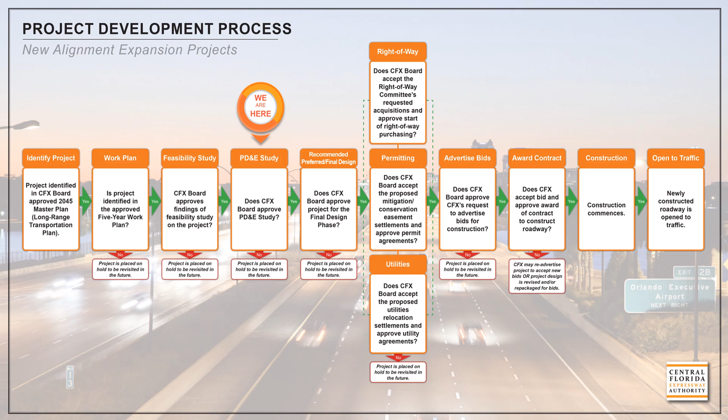The PD&E study phase considers environmental effects during the alternatives evaluation process and provides an opportunity for input during the early stages of project development as alternatives are being considered. This PD&E study will include the evaluation of the social, cultural, natural, and physical environment effects of any proposed transportation improvements, right-of-way considerations, and construction cost estimates. Any potential effects to social, cultural, natural, and physical environment resources will be avoided or minimized to the extent feasible. This study will also document potential project benefits such as improved mobility and economic benefits.

For this meeting today, we will look at the study area that is State Road 417, or the Central Florida Greenway, from State Road 528, the Martin B. Andersen Beachline Expressway, to State Road 408, the Spessard L. Holland East-West Expressway. This corridor is currently a 6-lane roadway, consisting of 3 lanes in each direction. This PD&E study will analyze and evaluate improvements in order to improve safety, increase capacity, and determine the highest level of service for the current and future needs of State Road 417. This will also complement the ongoing capacity improvements along State Road 417 from International Drive to State Road 528.

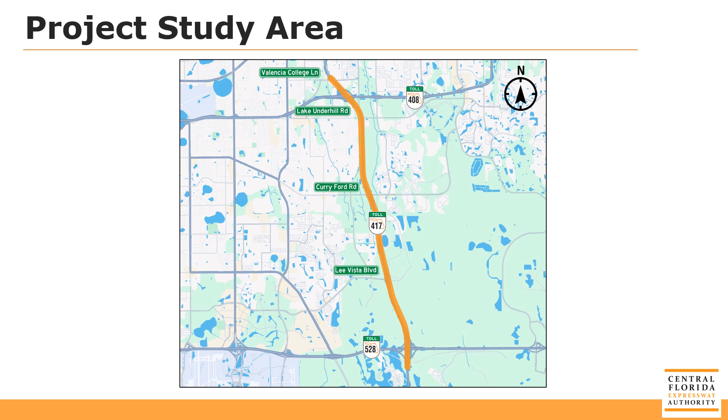The goals of this State Road 417 capacity improvements PD&E study include enhancing mobility for the region's population and economic growth, providing consistency with local plans and policies, promoting regional connectivity, enhancing evacuation and emergency services response, incorporating flex lanes to add capacity, and matching improvements of other segments of State Road 417.

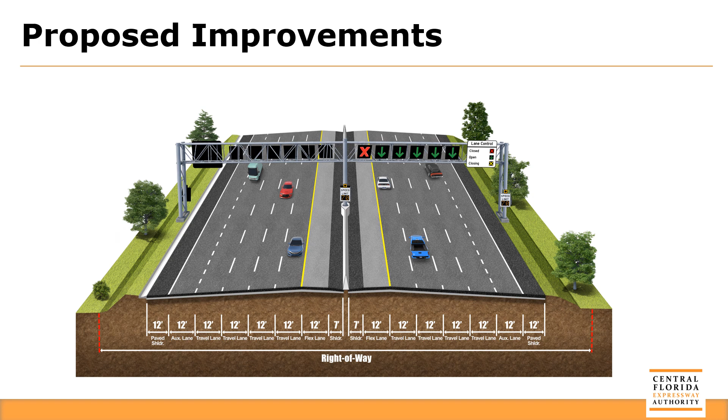As we just mentioned, to meet the current and future traffic demand and increase safety in the area, additional capacity is needed along this corridor. CFX is proposing widening this portion of State Road 417 from 6 general lanes to 8 general lanes with wider median shoulders, also known as flex lanes.

So, let's go through the corridor and review the proposed changes. Starting at the south end of the project, just north of the State Road 528 interchange, the project will begin where recent improvements on State Road 417 from International Drive to State Road 528 were just completed.

From the State Road 528 interchange, State Road 417 will be widened to 4 general use lanes, an auxiliary lane on the outside, and a flex lane on the inside in each direction, northbound and southbound.

From north of the 528 interchange to south of the Lee Vista Boulevard interchange, 2 of the existing ponds can be expanded within the existing right-of-way. However, additional right-of-way is needed to expand the existing pond just south and east of Lee Vista Boulevard.

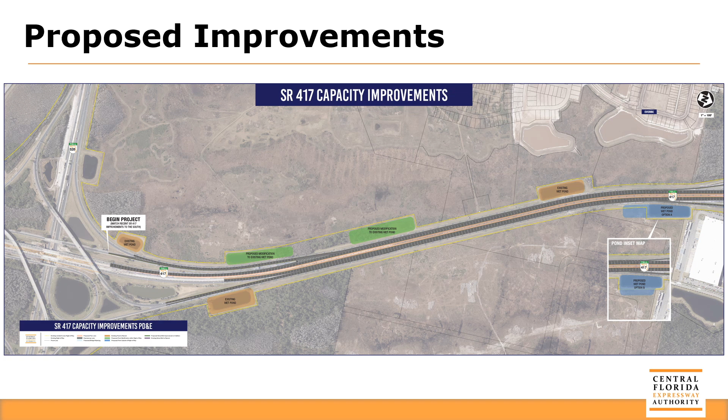At the Lee Vista Boulevard interchange, improvements include adding a second left turn lane from the northbound off-ramp and a second right turn lane from the southbound off-ramp. Along Lee Vista Boulevard, a second left turn lane would be added in both directions to access either the northbound or the southbound on-ramps. The existing toll plaza would be reconstructed to remove the cash lanes and convert to an all-electronic payment only.

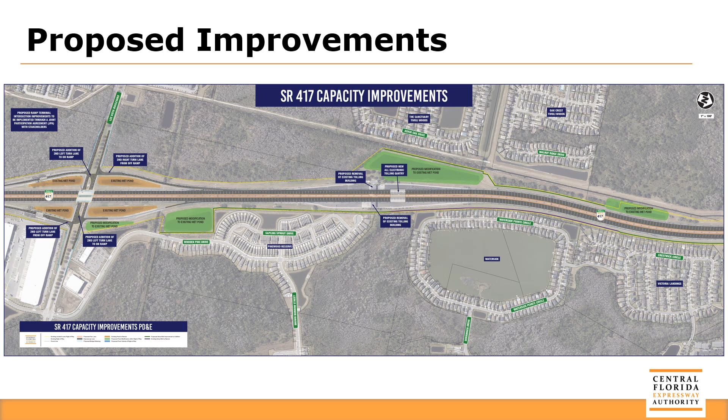From the Lee Vista Boulevard interchange to south of the Curry Ford Road interchange, 3 of the existing ponds can be expanded within the existing right-of-way. 1 existing pond expansion will require additional right-of-way, but the additional right-of-way is a parcel that is already owned by CFX. Additional noise barriers are proposed along the Pinewood Reserve, Victoria Landings, and Tivoli Woods communities.

At the Curry Ford Road interchange, improvements include adding a second left turn lane from the northbound off-ramp and a second right turn lane from the southbound off-ramp. Along Curry Ford Road, the left turn lanes to the northbound and southbound on-ramps would be extended to provide additional storage. 2 additional ponds requiring right-of-way are needed in this area of the project. Both are located east of State Road 417 near the Curry Ford Road interchange.

From just south of the Curry Ford Road interchange to approximately Barry Deese Road, 1 existing pond expansion will require additional right-of-way. There is 1 new proposed pond at the Curry Ford Road interchange on a parcel that is already owned by CFX, while 1 new proposed pond just north of the interchange will require new right-of-way. Additional noise barriers are proposed along the east side of State Road 417 from north of the Curry Ford Road interchange to Barry Deese Road, serving the Econ Landing community.

Noise barriers are also proposed along the west side of State Road 417 to serve the residential homes along South Econlockhatchee Trail.

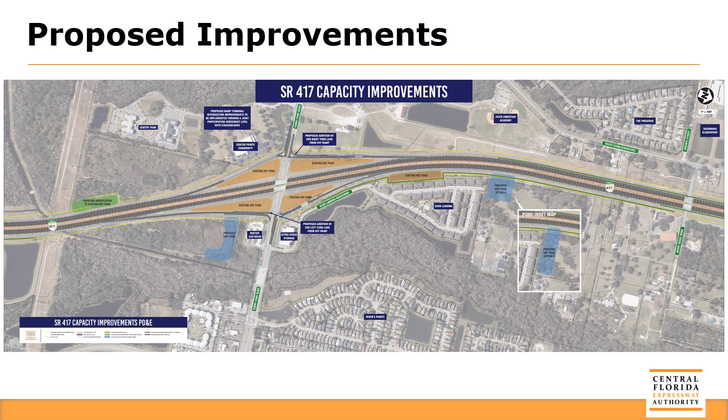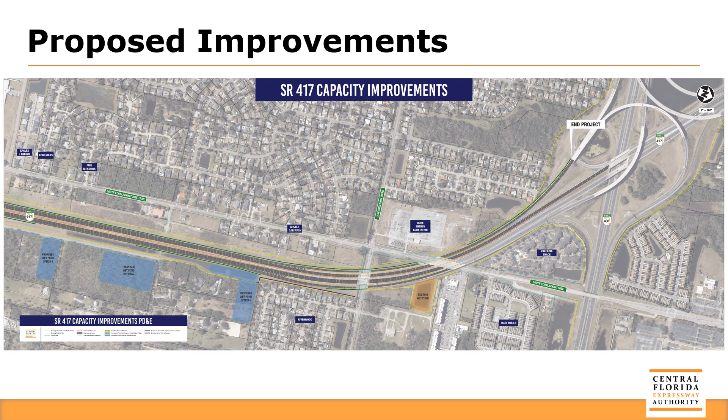Continuing north, as the northbound lanes approach State Road 408, improvements would transition to match the existing lanes on State Road 417. This includes terminating the flex lane. The 2-lane exit ramp to State Road 408 would be lengthened by moving the start point further south. Additional ponds would be needed along the east side of State Road 417, north of Barry Deese Road, and all of these ponds would require new right-of-way.

So, what are flex lanes? Flex lanes allow traffic to continue to move when an incident causes a closure in one or more of the general use lanes. For example, if a serious crash occurs and closes one general use lane, a flex lane would open and allow traffic to safely pass the crash at a reduced speed.

Additionally, flex lanes can be used to provide temporary capacity during emergency events, such as hurricane evacuations. Flex lanes are controlled by dynamic overhead messaging signs that indicate which lanes are open and which lanes are closed. Additional information about flex lanes can be found at cfxway.com/flexlanes.

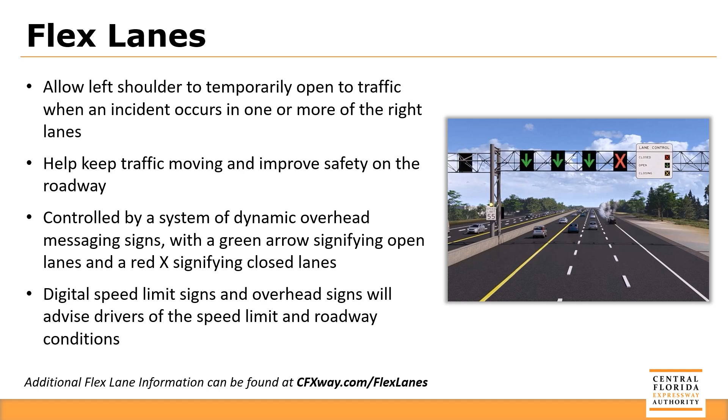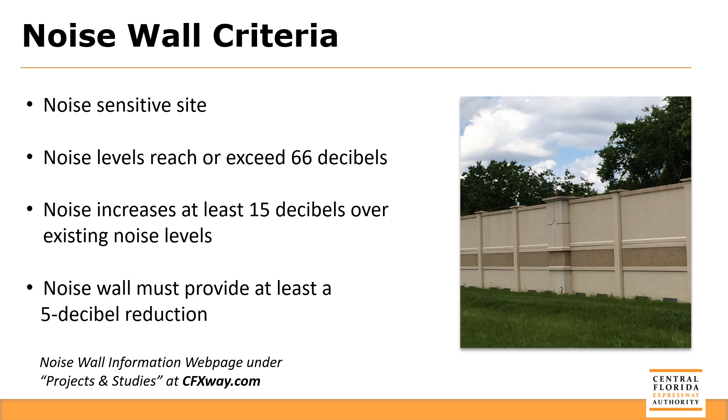There's also consideration involving the cost per benefited property. Do remember the noise walls lessen the road noise. They do not completely block out the sound. Additional noise wall information can be found at cfxway.com.

Let's take a quick look at the project schedule. This study kicked off in October 2024. Tonight, we are holding the Alternatives public meeting. The study is anticipated to be completed in April 2025.